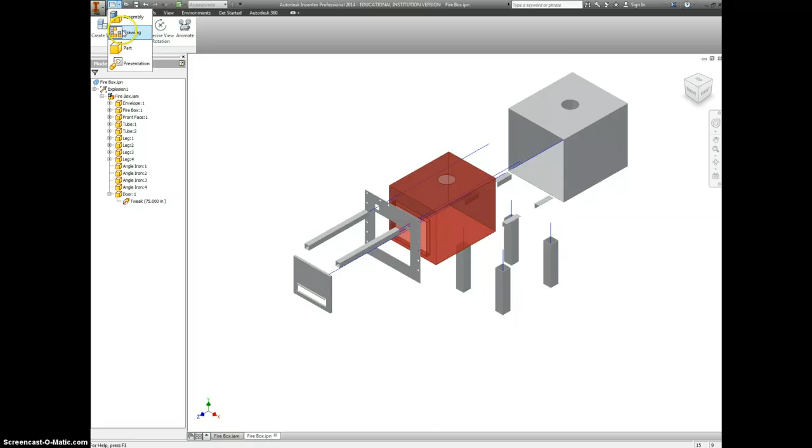Now that we've finished doing the presentation and the assembly, I think it's time to start doing some drawing files. So let's open up drawings, and we're going to go to our sheet and edit the sheet to be A-size paper. Make sure you change your border as well. So instead of the ANSI large, you can delete that out. Go into drawing resources under title blocks and put in ANSI A.

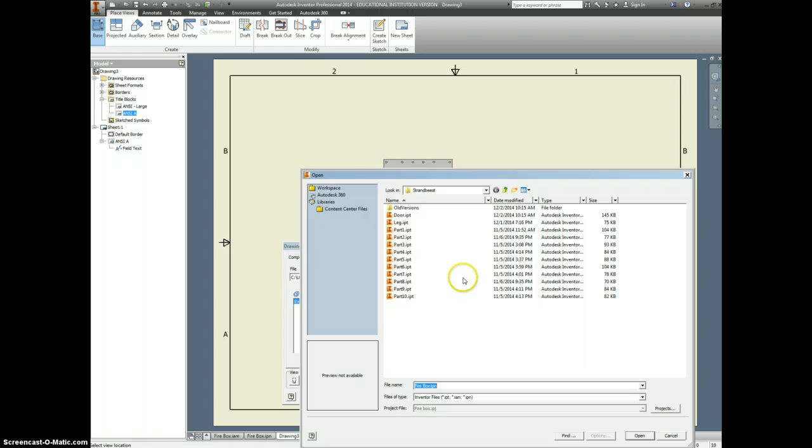And now for your base, let's pick some parts. And I think it's best if we start with the envelope. So let me navigate to the right folder here. It's under desktop for me. And Firebox. There's the envelope. And yeah, I think that'll be okay. We'll put in this view.

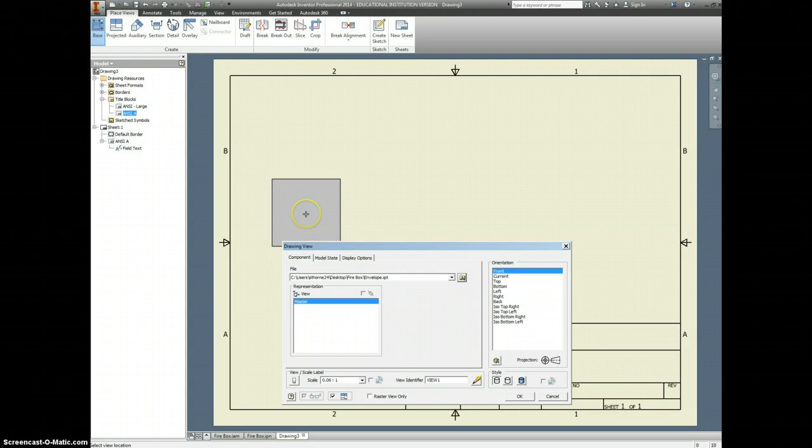I'm going to show the top and the bottom. I'll show a side view and an isometric view. Notice this doesn't have any of the other parts attached to it. There's no angle iron in here. There's no firebox. It's only the things that actually go with the envelope. So that's what we wanted.

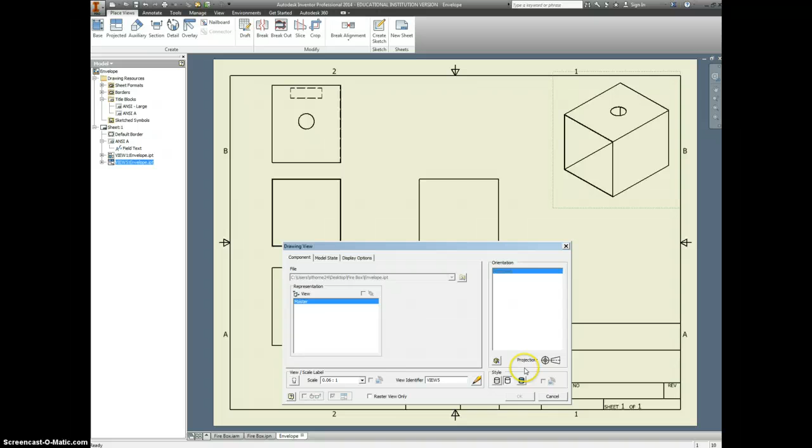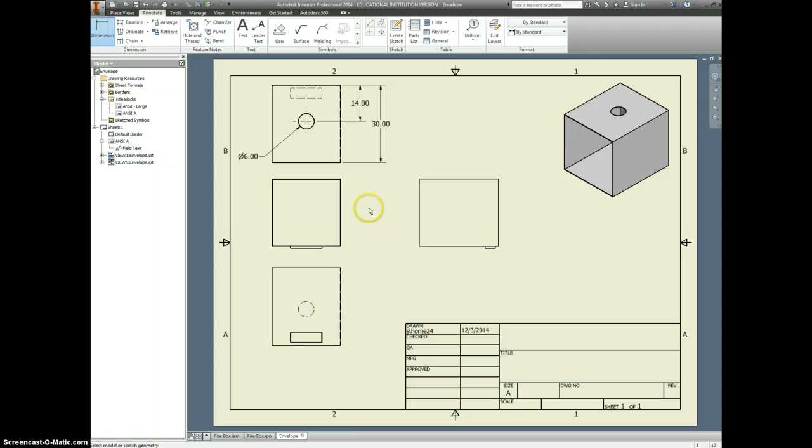Okay, we do need to show a couple of things, like here. Anytime you see something that looks like a circle, show the center mark for it. Looks like that's 14 inches off the back of there. The overall width of this guy is 30 inches. It'd be nice to know this is a 6-inch diameter hole and where that hole is placed with respect to other things.

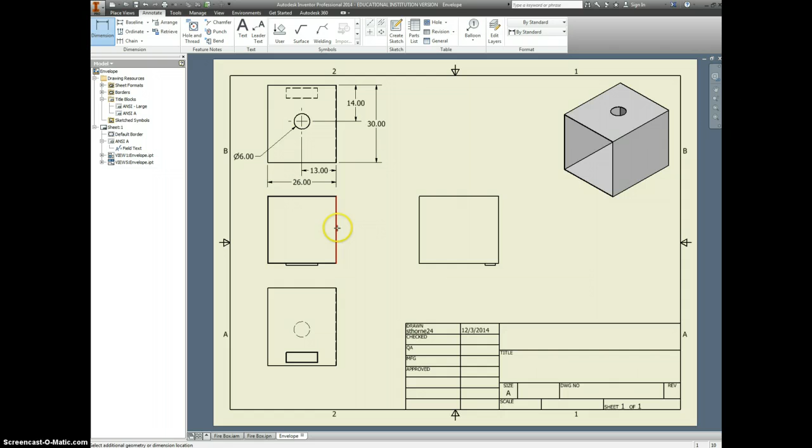So 13 inches over. And that the whole box, let's move a couple of things around here. That this whole box is 26 inches. Here we have front to back is 26. Does that seem right? Yeah, I think it's what we designed it for. Okay.

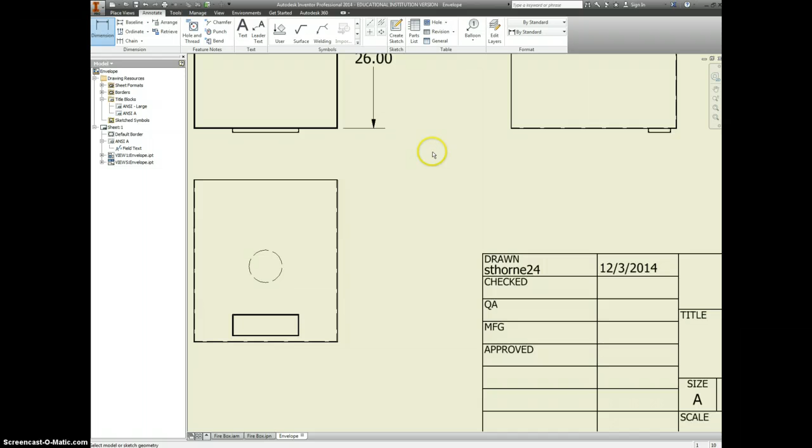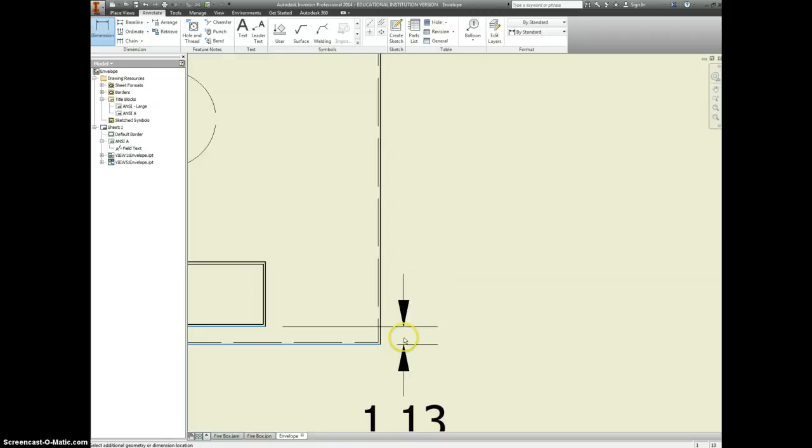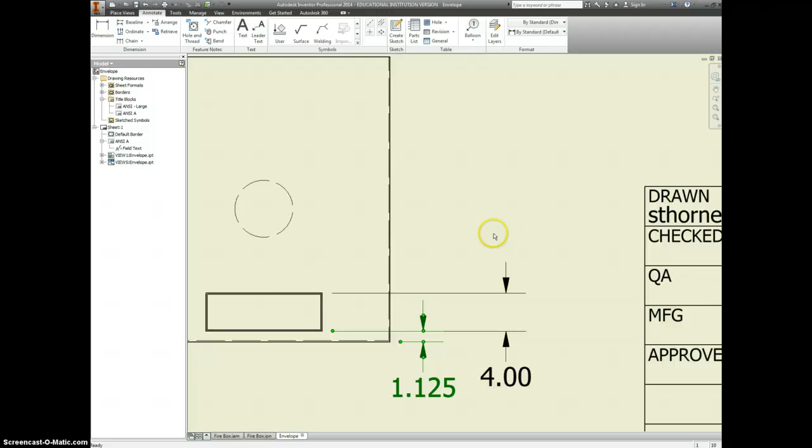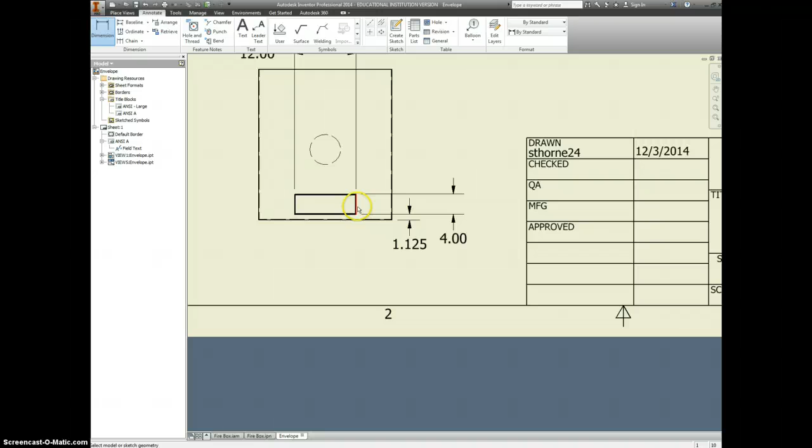Looks like we decided to go with 1.125, and that's okay too. Just misremembered. We need to know where this is located, so I know kind of the size. It's 4 inches wide. We don't know how big it is, so let's put in a size dimension first. This is a 12-inch wide piece, and I'll put the number on this side instead. And then it's located 7 inches off that edge. And we'll drag that to the other side here.

Okay. So now we have two location dimensions, that it's up 1 1/8 inches and over 7 inches. And we have two size dimensions, that it's 12 inches wide and 4 inches long, or 4 inches tall.

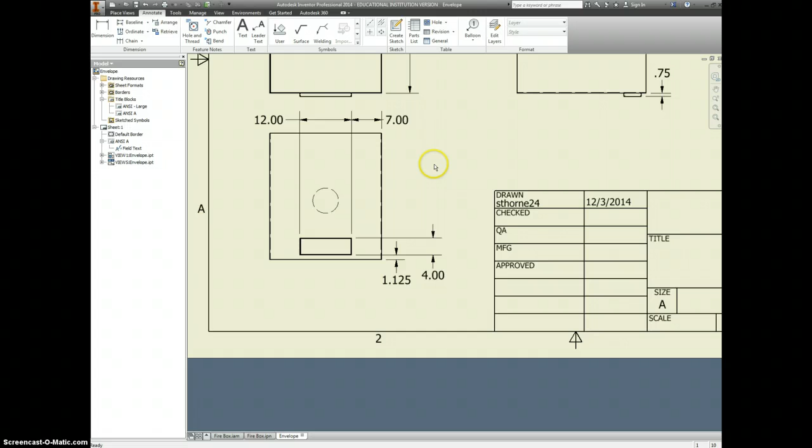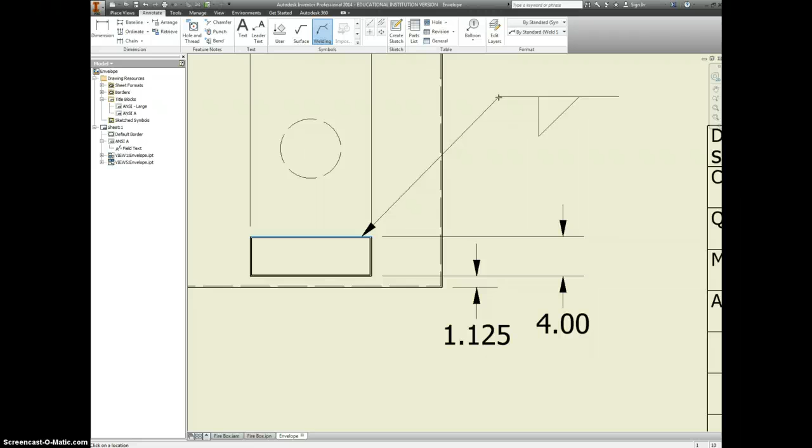Now what we don't have is a way to tell whoever's welding this what kind of weld to use on this. We have these welding symbols, which we haven't used at all yet. Click on the welding one, click on this top surface here, and we are going to continue with that. This is going to have a fillet weld on both sides. Alright, so fillet on top, fillet on bottom. They're actually 3/16 fillets.

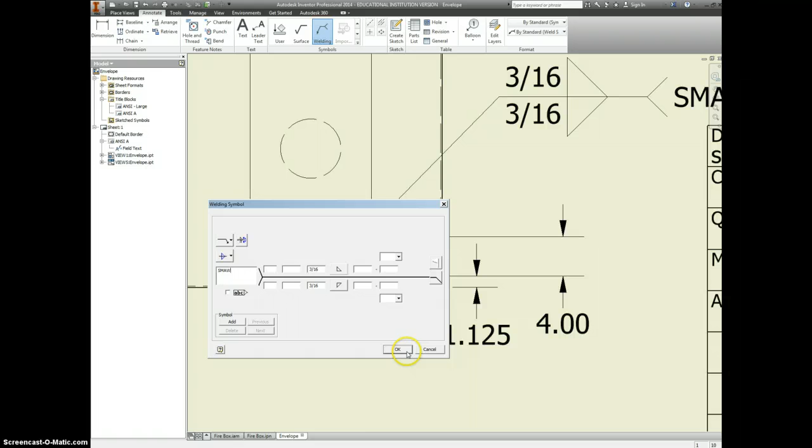And this is shielded metal arc welding, SMAW, and that might be something I put on a test. So finals coming up here towards the end of the year, something you may want to write down and save for later. We'll make a quick note that this is 1/8-inch steel.

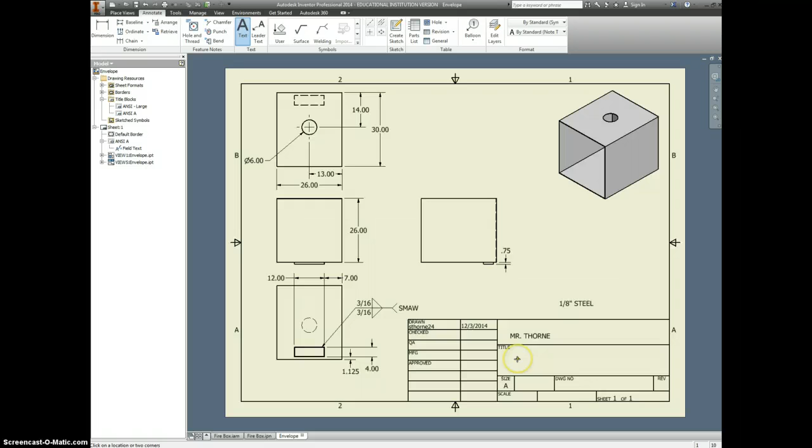I'll put in my name. Title for this is envelope. Scale I didn't pay much attention to. It just kind of came in at the right size. And that's a messy looking scale. So I'm going to make this 1/15 instead. And I think that should still look good. It does, more or less.

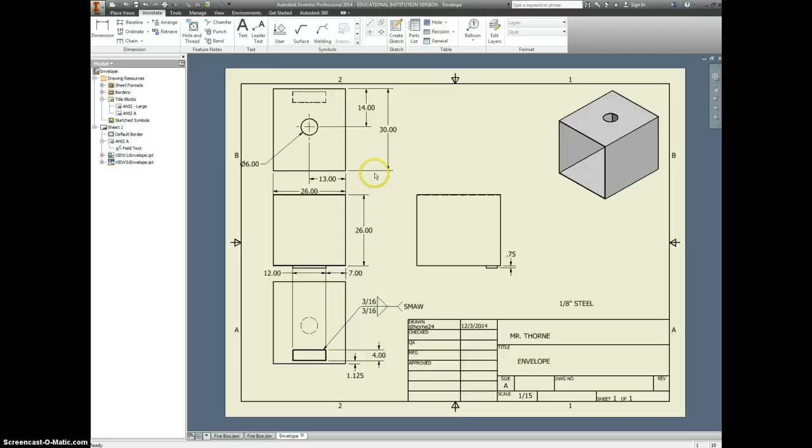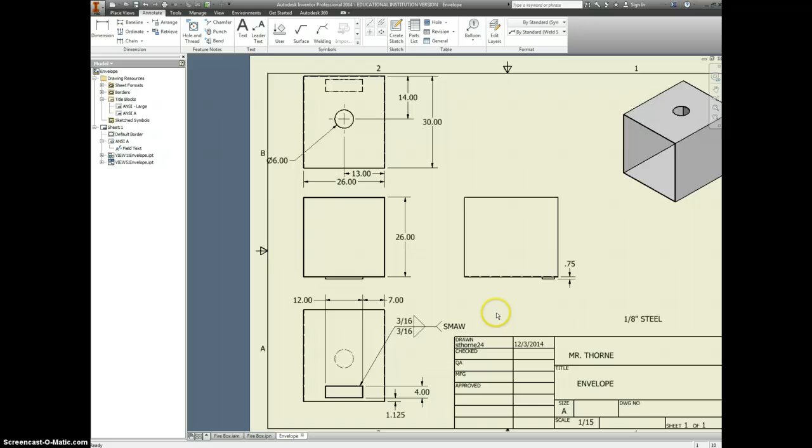I just may have to clean this up a little bit. Space it out so it looks nicer. Okay, that looks good for the envelope. Now I'm nitpicking. Alright, ready for a new view, so we go place views, create a new sheet.

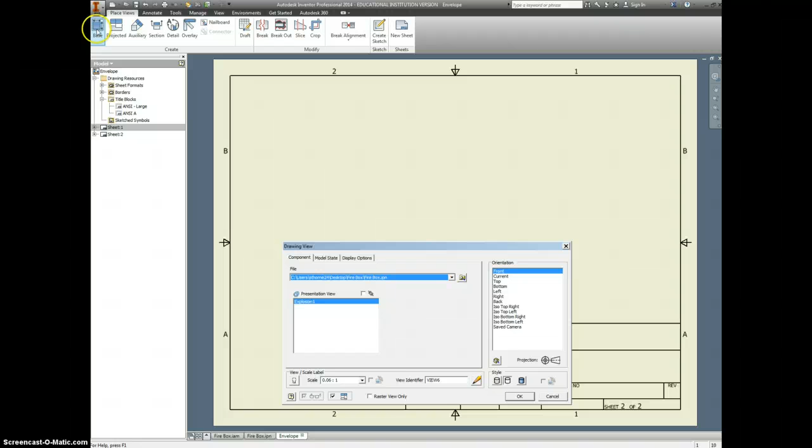Second view, let's go ahead and go to your base. We're going to pick the firebox inside, which is just labeled firebox, right? There's the part file. Open that up. And if we wanted to, we can go back and change the color of this. Not necessary really, but definitely something we could do.

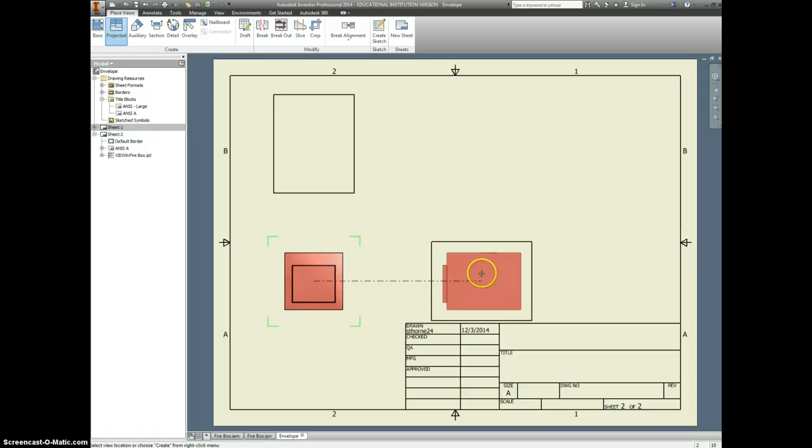And I'm seeing an issue with this. I thought for sure we created holes for our tubes, and I don't see holes for the tubes at all. So let's go back to our part file real quick, which is still in here. I can just double click it. Alright. Well, it sure looks like a cutout to me. Oh, you know what? We put a cutout on the front plate. We did not put a cutout on the firebox.

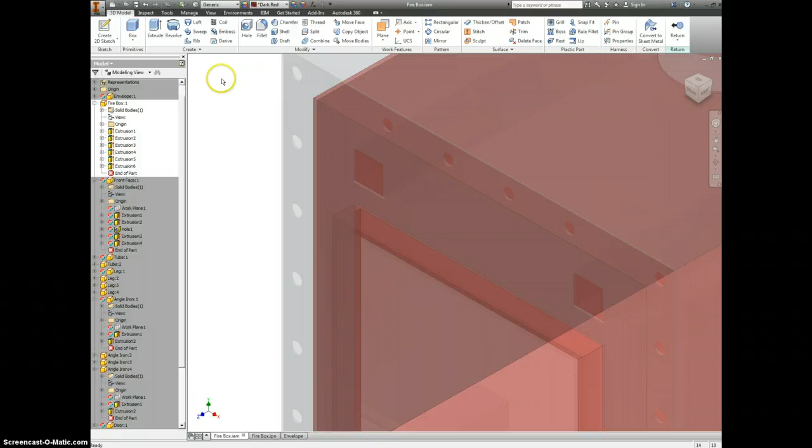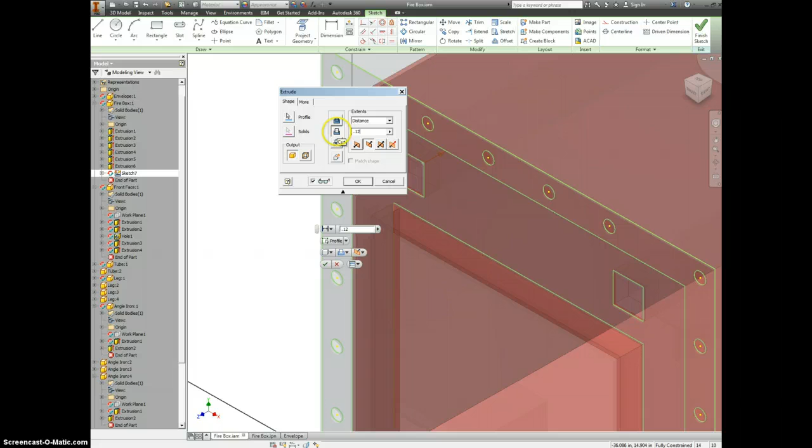So let's make a new sketch. Right click, new sketch. I can just project the geometry of the front plate right onto the, oh, I got them both. The front plate onto the firebox. We can hit extrude, select our two profiles, click, click, that we are going to be cutting 0.125 and say OK. There we go. I thought something seemed off.

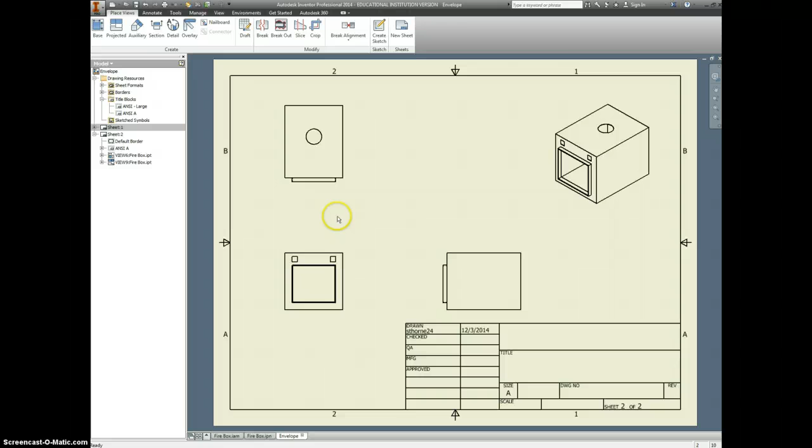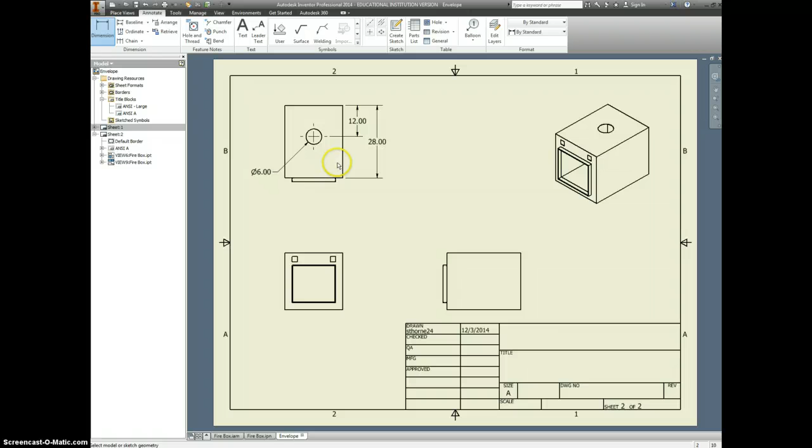Let's make sure we save this. Yes to all. OK. And when we go back to our drawings, we'll see that now we have these two cutouts, which is good. Let's go back to annotate. Again, anytime you see a circle, you want to add a center mark. We're going to dimension down to it, 12 inches from the back there. And the whole side is 28. Diameter is 6. Matches the other one. That's good. Distance from the edge, looks like this is 11.

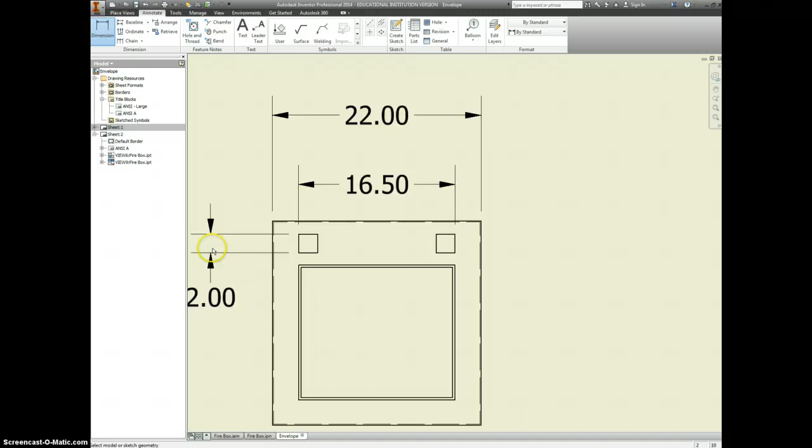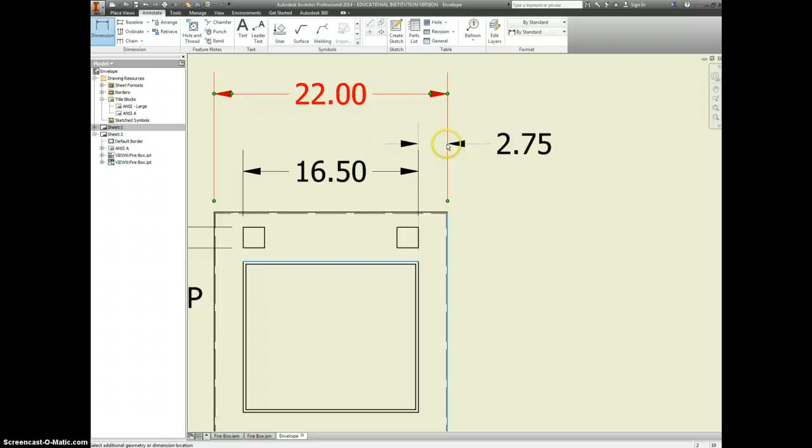These are actually lined up with the thing just below them. There's 16.5 across. Whole box is 22 wide. These are 2 inches all the way around, and because there's 1, 2, 3, 4, 8 of them, I'm going to add a TYP for a typical dimension after that. And I also want to show this spacing here. Actually, I'm going to go all the way down at this one to show that this is offset 2 3/4 of an inch.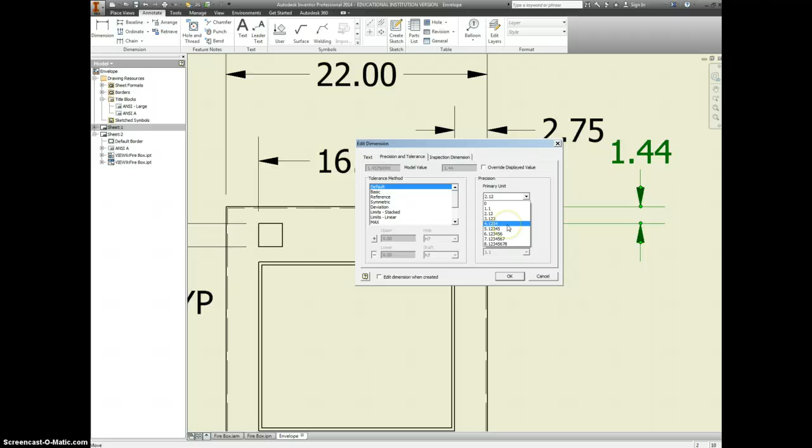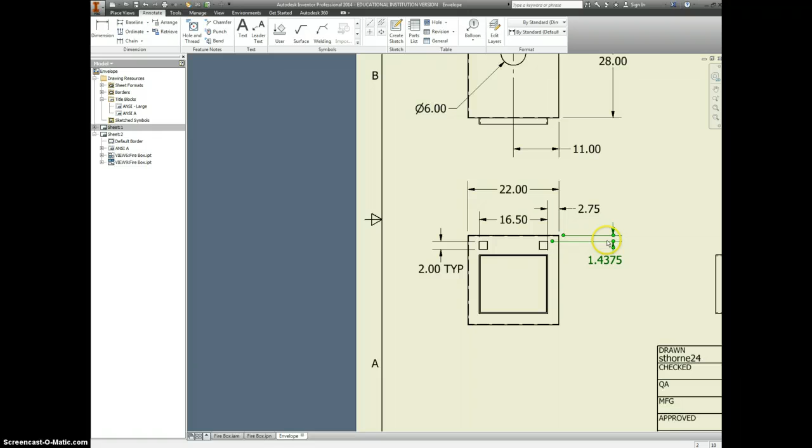Okay, it'd probably be good to see how far down that is. 1.44 doesn't seem quite right, so let's double check that. Precision and tolerance, 1.4375 seems a lot nicer. 4375, yeah, 4 digits. That's out just a little bit far. I don't know if it's going to let me put that back in or not. We'll just delete it. And give it one more try.

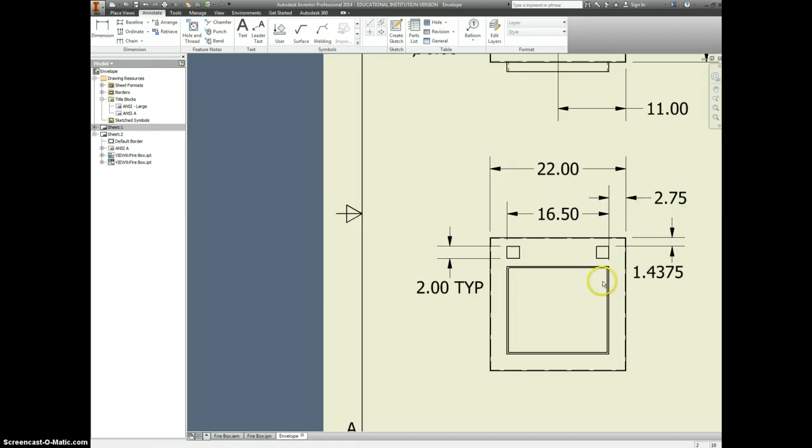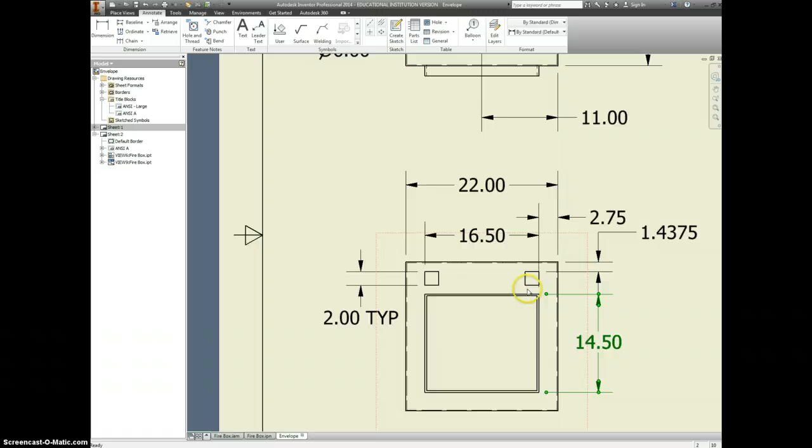I'll put in a note here, not really a note, put in a dimension here that this is 14.5. See all that work? I'm just going to end up putting it up here anyway. This whole thing is 14.5. And both of these dimensions together should be 22. Excellent.

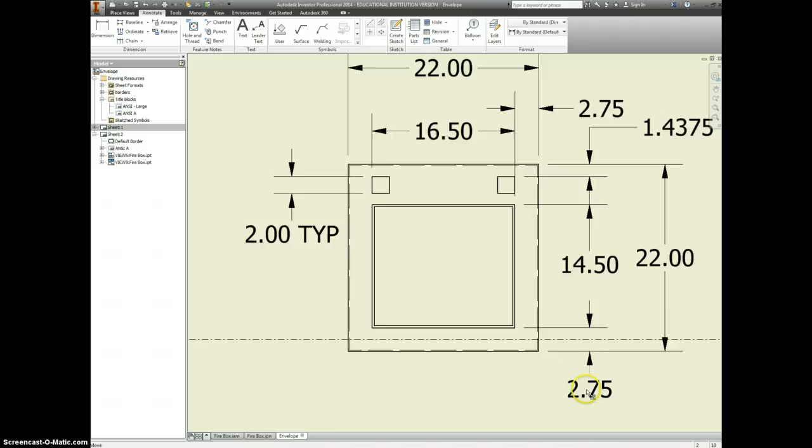Oh, and I should also say that the distance this is off the bottom is 2 3/4. Because I don't think we have that anywhere else. We have, this is the size dimension, there's the location for it, and there's the other location for it, and there's the other size for it. Cool.

This is a flange that we have put on here, so we do need a welding symbol for that. And we're actually going to make a couple connections to it. So it's going to be for this part. I might add a couple more arrowheads to it, but it is going to be fillet on both sides, and is still going to be 3/16, which is your most common weld that you might do. And again, this is SMAW, which for the test again, shielded metal arc welding.

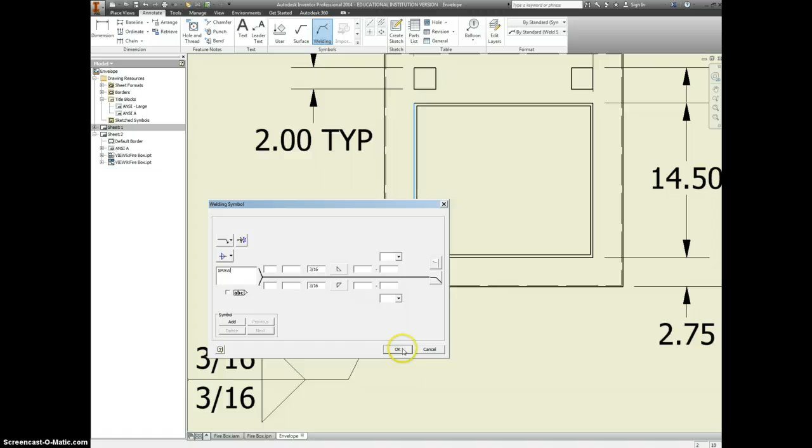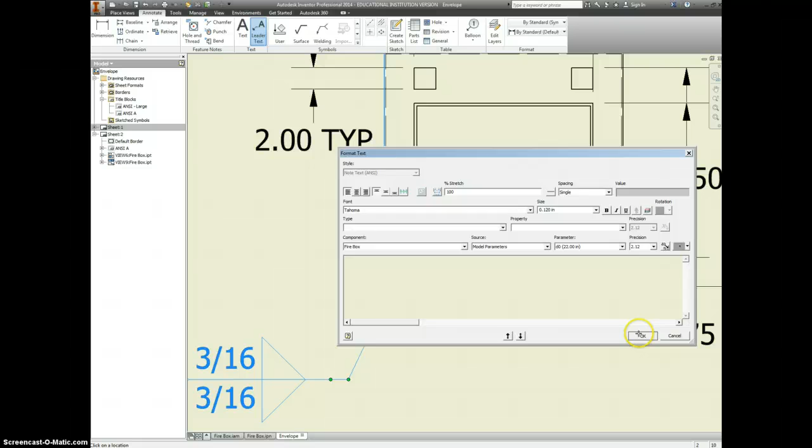And let's just add a couple of leader lines so I can show that this is also happening here. You know what? This arrow's in the wrong spot. And it's not going to let me change that. Oh, let's change it with this arrow. That one doesn't want to change either. Okay, let's try one more time. Leader text. Not all of these edges are going to be welded. This one is. And this one is.

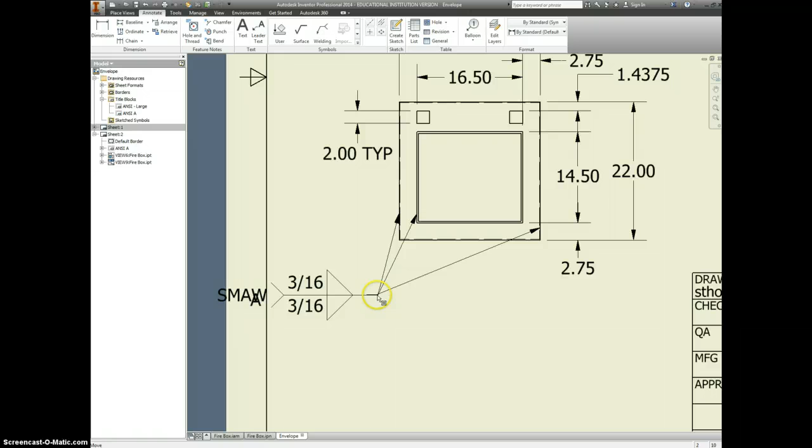We can get away with folding some of this too. So it's a big sheet of metal. We're going to fold some of it, and then for the rest of it, we're, uh-oh. Now we're really in trouble here. Wow, this is really giving me trouble. Alright, so we can fold some of this, and there's other stuff that we can get away with welding instead of folding. So add 3 little arrows there.

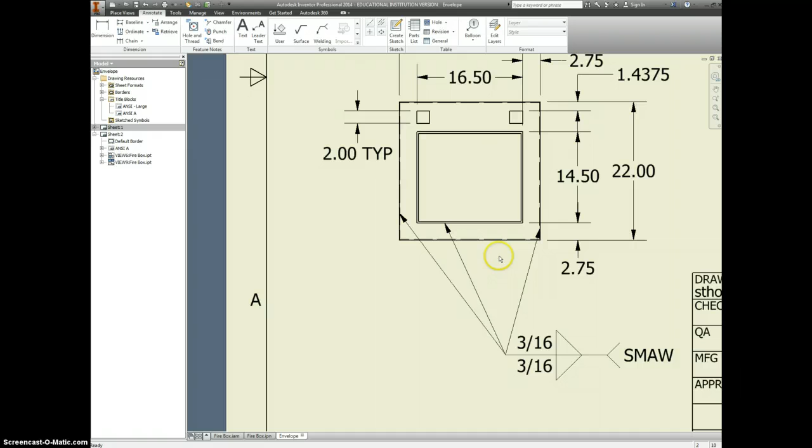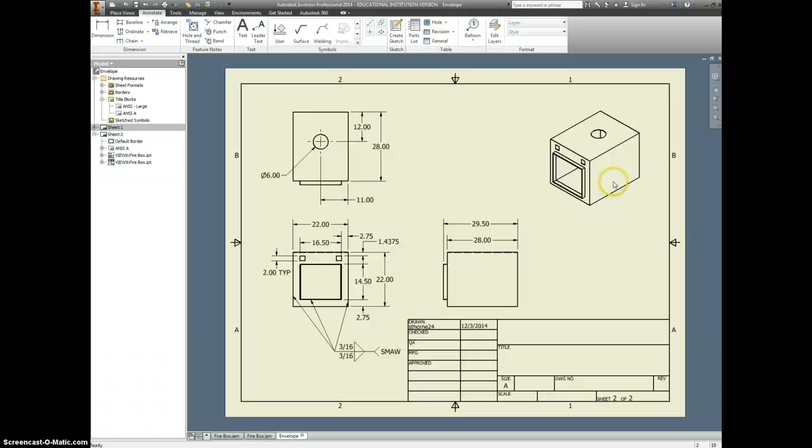Looks good. And I forgot to add dimensions on this part. So this whole box is 28 inches long. And if we count the flange as well, that's 29.5, so it's 1.5 inches for the flange. We'll make this shaded. I don't know if we did that to the other one. Did we? Yeah, we did.

Put my name in here. Scale, we're going to put back at 1/15. Title, Firebox. And we need to make sure we change the scale to 1/15. We'll pick up with the next video.